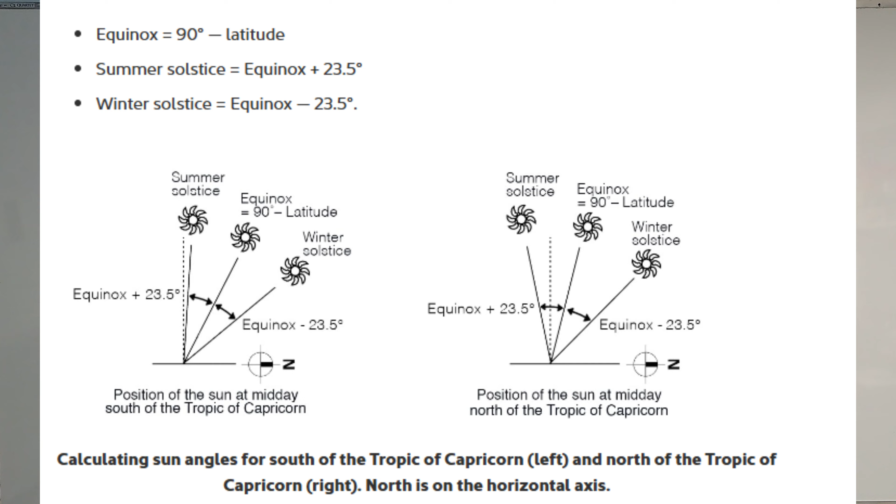The first thing we need to work out is what our winter sun angle is. So it should be a picture pop up on the recording. Basically, we're looking at our winter equinox angle - our sunshine angle is going to be our latitude, 90 degrees minus our latitude. So that's our equinox.

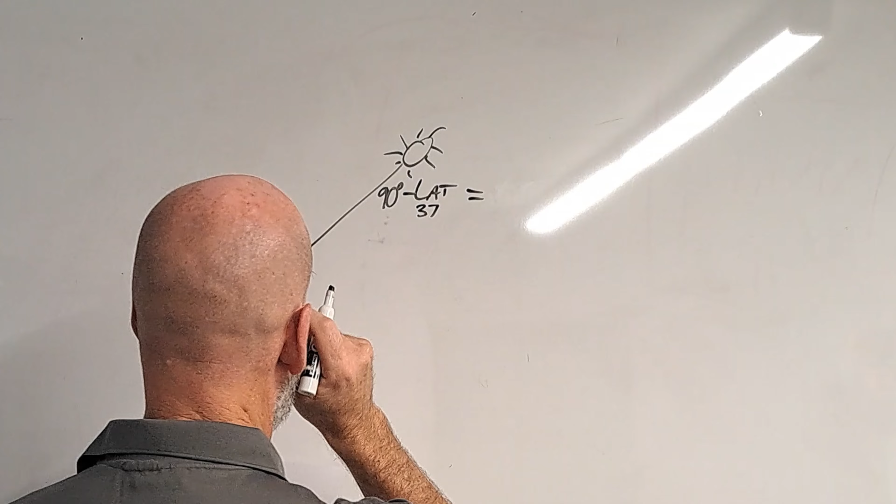So for where we are currently, or where we're going to base this out of - where I currently am - we are at near enough 37 degrees. So at 90 minus 37, that's 53 degrees, so 53 degrees is our equinox.

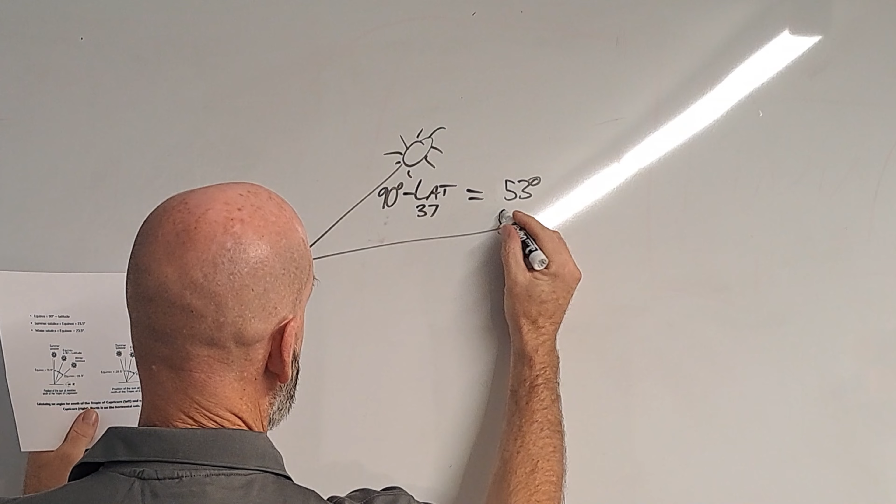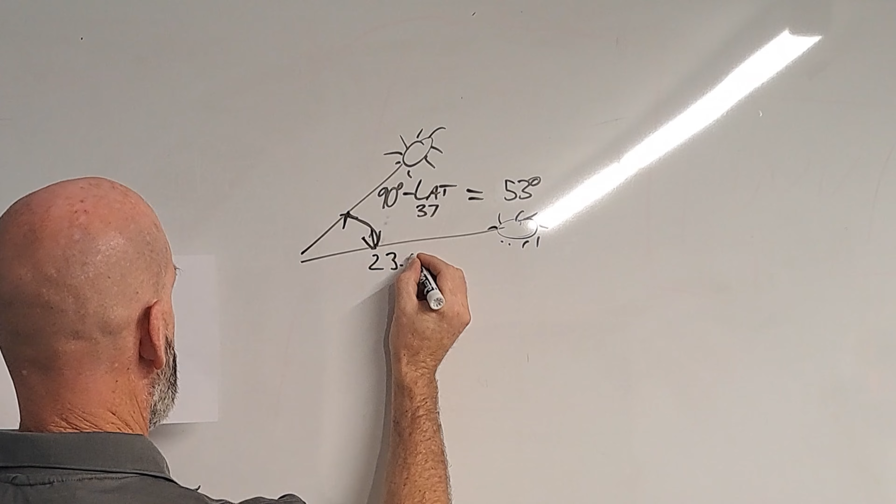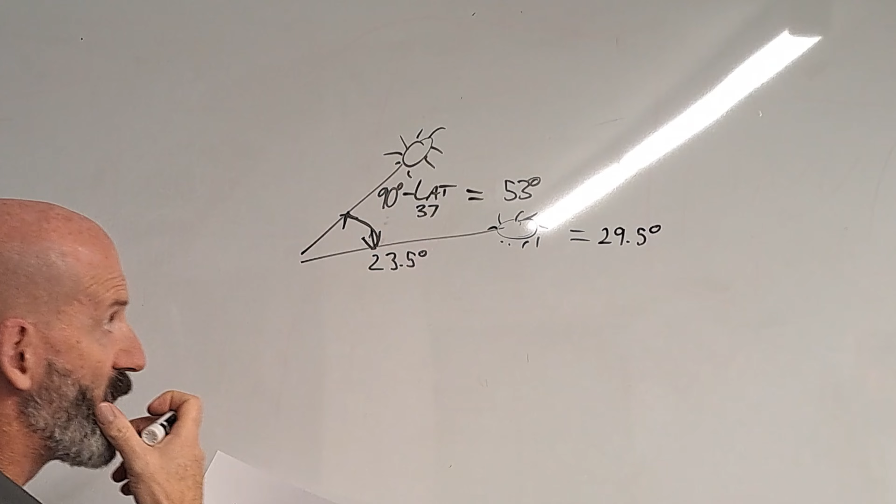Now, to get to our winter solstice, because it's lower in the sky, there's going to be a reduction in angle of 23.5 degrees. Let's see if my maths are any good here, which should give us a winter sun angle of 29.5 degrees. Okay, if I've done my maths right, that should be correct. It's near enough, so we can just round that up and say 30 degrees.

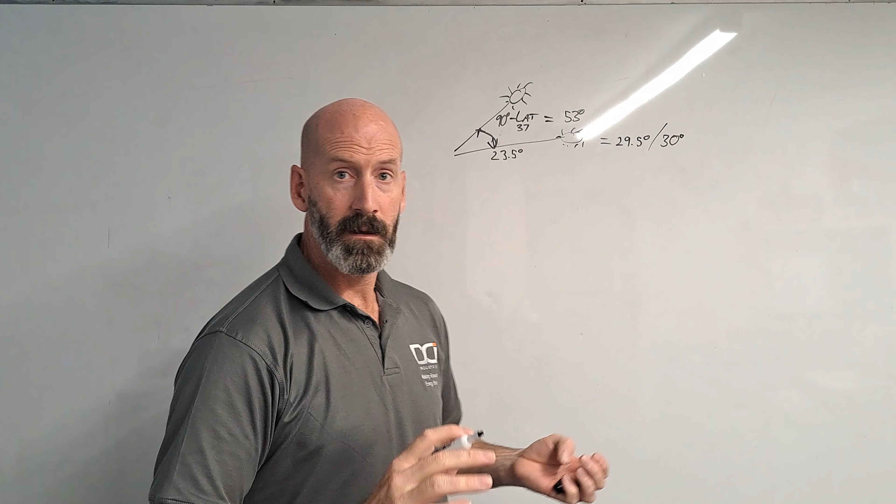So now what we've got to look at is the setup of how we would actually set some panels up. I'll leave that up there for now. Okay, let's set some panels up.

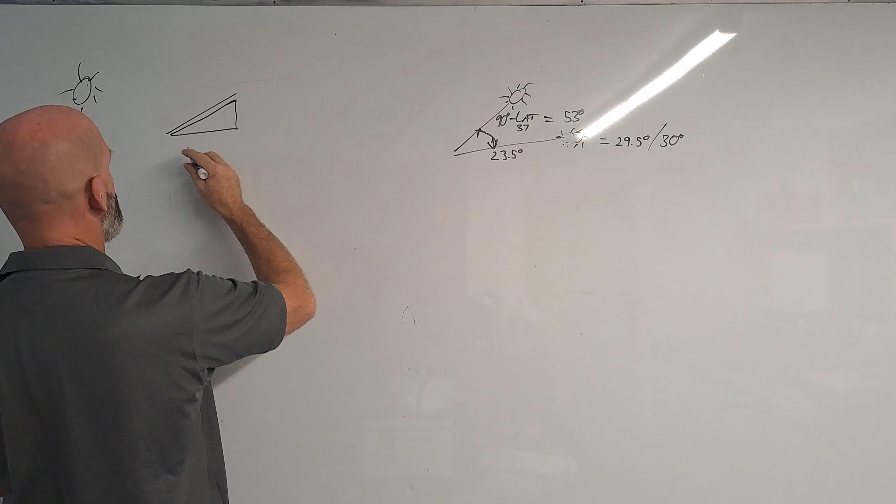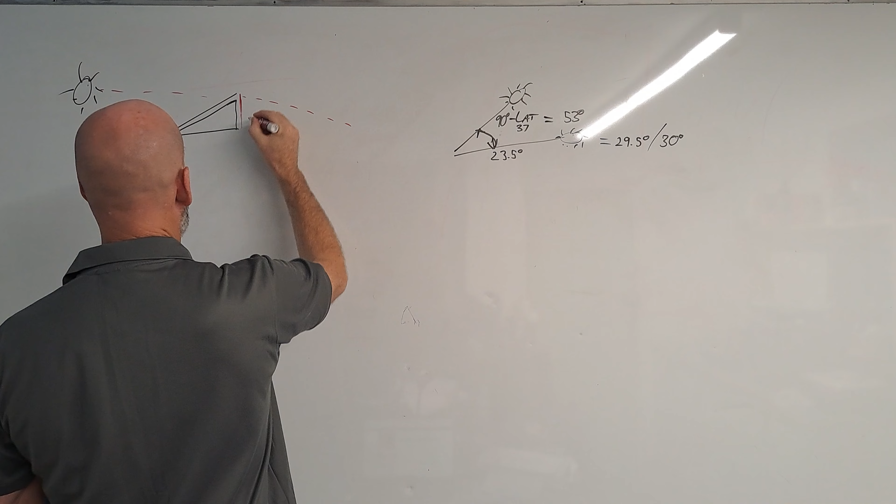So let's say we've got our sun over here. We're going to have our first panel there, which will have a frame - generally we're using tripods or some similar setup. Then, from the sun, there's going to be this reverse angle, which will create from that same height all the way through this reverse angle, and that will tell us where that shadow will hit.

We're going to add plus 100 millimeters there, and then we can put our second panel with its tripod under it. So what we need to know is, from this constant point of the back edge of that triangle frame to the back edge of the next triangle frame, what that distance is - because that's going to tell us what all of our spacings are going to be.

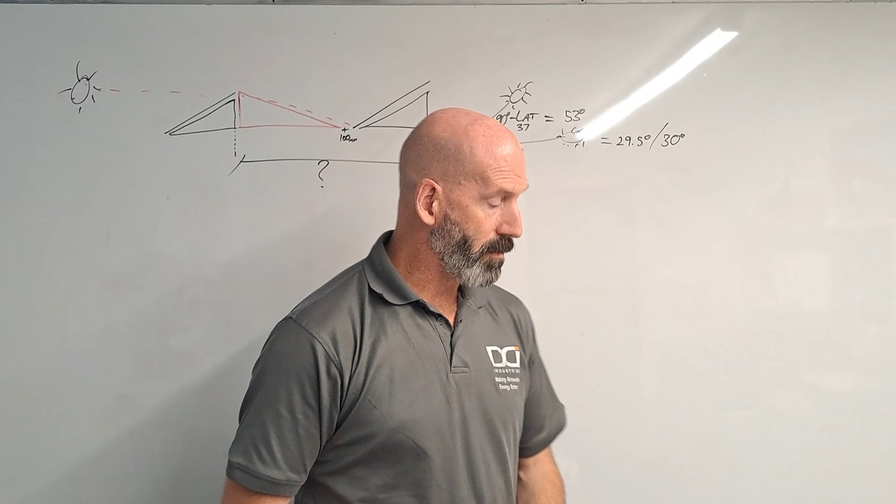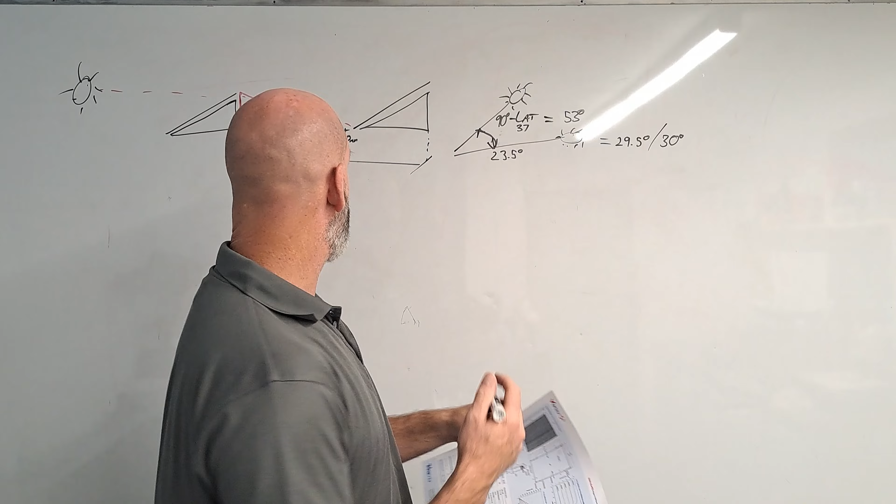So we start this with what we do know - let's fill in what parameters we know. We're going back to Pythagoras' theorem on triangles when we get into this. So we're looking at the panel that we're going to use - very important, that's our physical size. Our panel overall length is going to give us our hypotenuse, which is 1762.

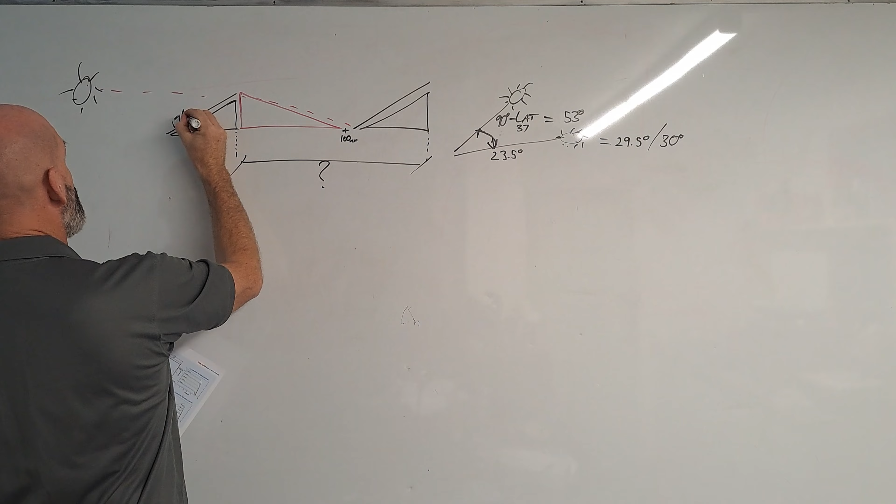So we know this one here, 1762. Now we don't need to worry about how far off the roof or anything it is, because by using the same mounting system each time, we're going to have the same spacing off the roof on either side. So we just pick a definite set point, which is going to be the front edge of the panel, or in this case, the back edge of the frame - they're still all consistent. Anyway, let's run this one.

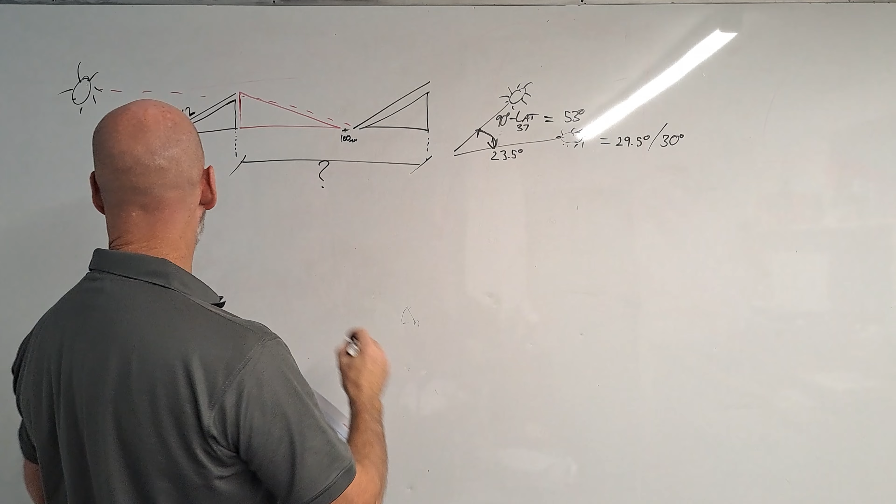And so we know what pitch we're going to put these at as well - we're going to put this at 30 degrees. It's pretty standard for the southern part of Australia. We want to pitch at 30 degrees to pick up that winter sun.

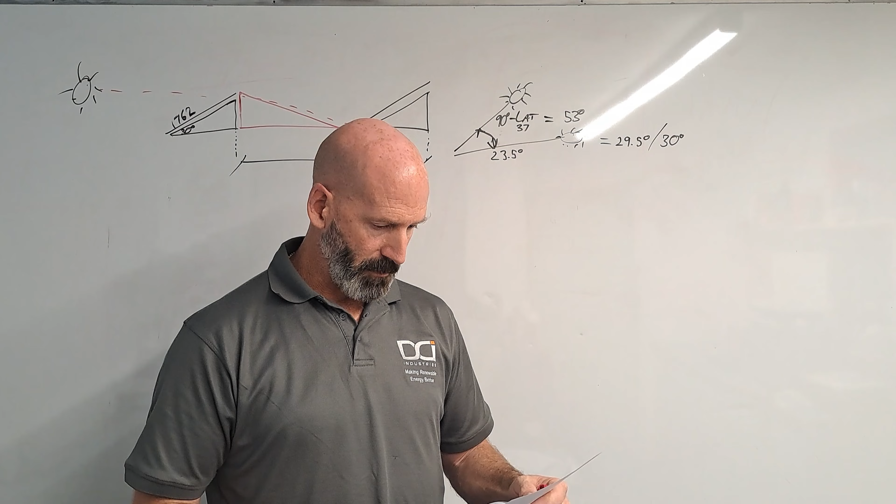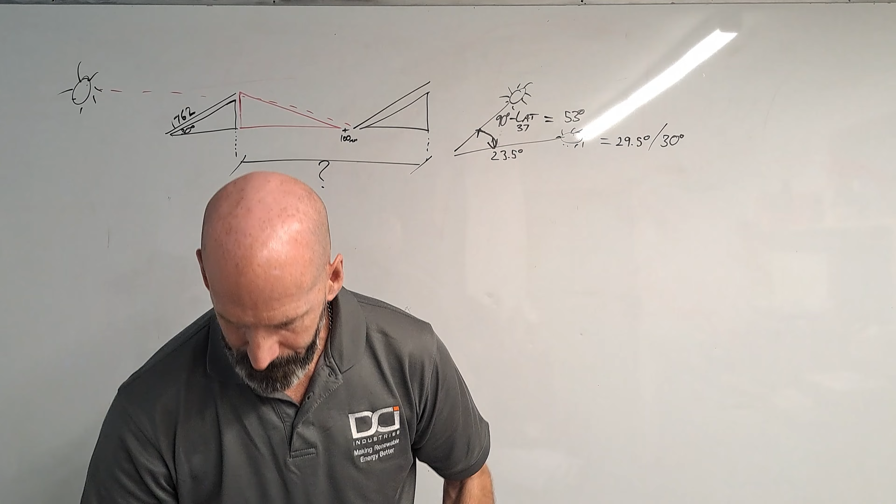Okay, that is going to now give us - on this, we know our hypotenuse and we know our angle. The quickest way to do this, if I can wake the laptop up, is you just jump online and grab a right angle triangle calculator.

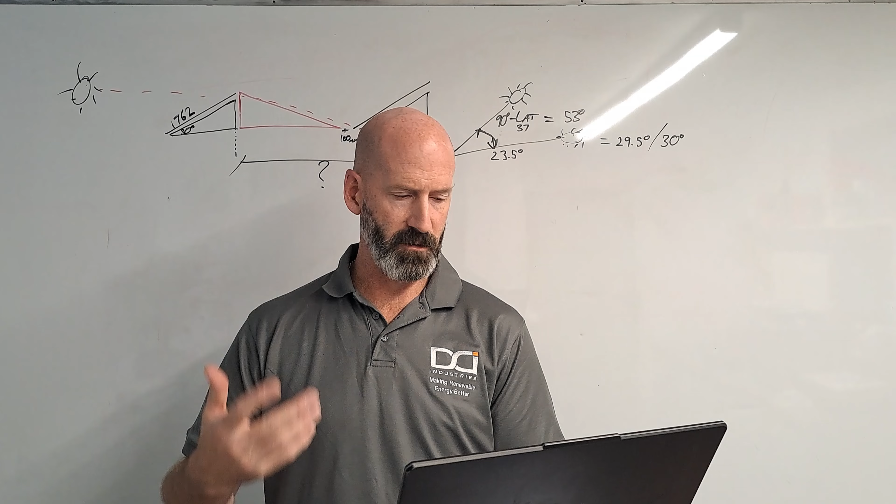And so it will let us fill in - what's our A angle is 30. It's going to give us, let's get rid of that - our hypotenuse was 1762. You only need to have one length and one angle, and it will give you everything else, because a right angle triangle works on fixed parameters. We know what that other degree measurement is.

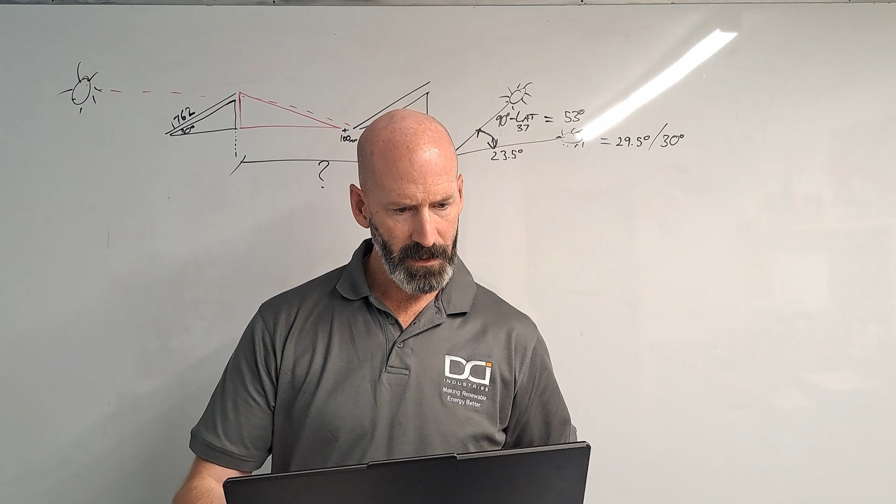So that tells us now that A, which is our rear height, is 881. So that is this height from here to here - that there is 881.

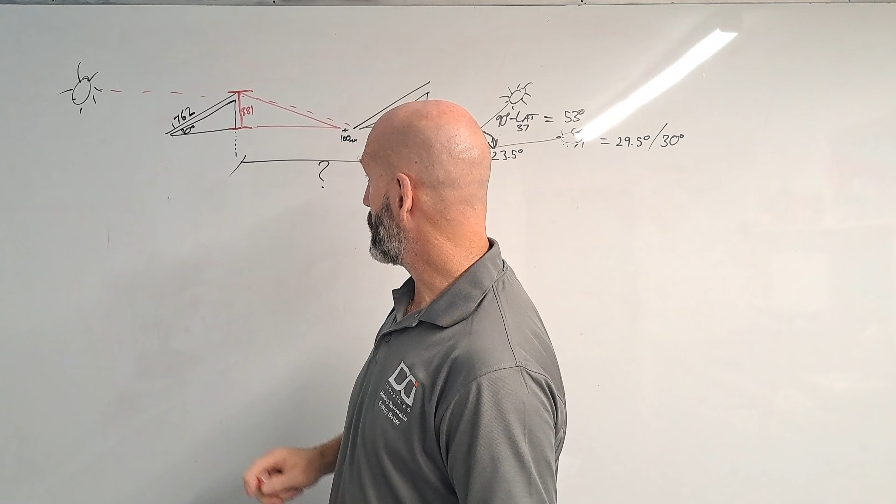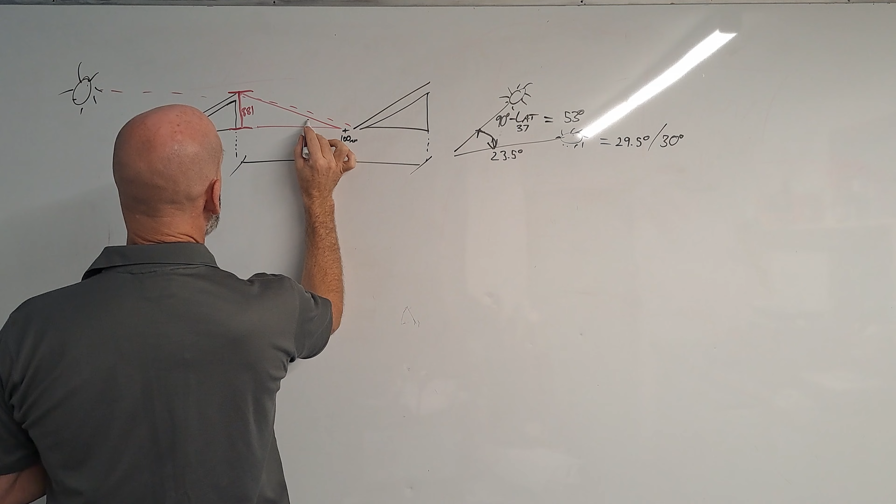Okay, that's the only other height we need in this figuring out, the rest is irrelevant. So now that we've got that height, and we know our sun angle - whatever we calculated that at, let's say 30 degrees - it means we also know that this, in its reverse, is 30 degrees. That's that same angle we're looking at with that shadow. So this is midday in the middle of winter. Now let's recalculate this.

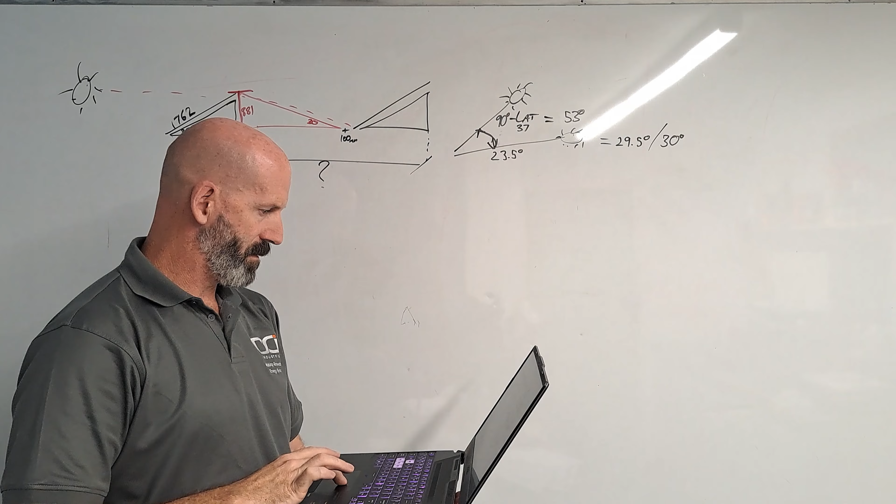We've got the same... well, actually it's going to come out the same. I'm just looking there going, hang on, this is going to come out the same. If that number was different, this would all change. But anyway, because this is 30 degrees, that's 881. We're going to be at 1762 as our reverse angle, just because both angles are 30 degrees. If this location was different, and that number is anything other than the same 30 degree pitch, then this calculation would change.

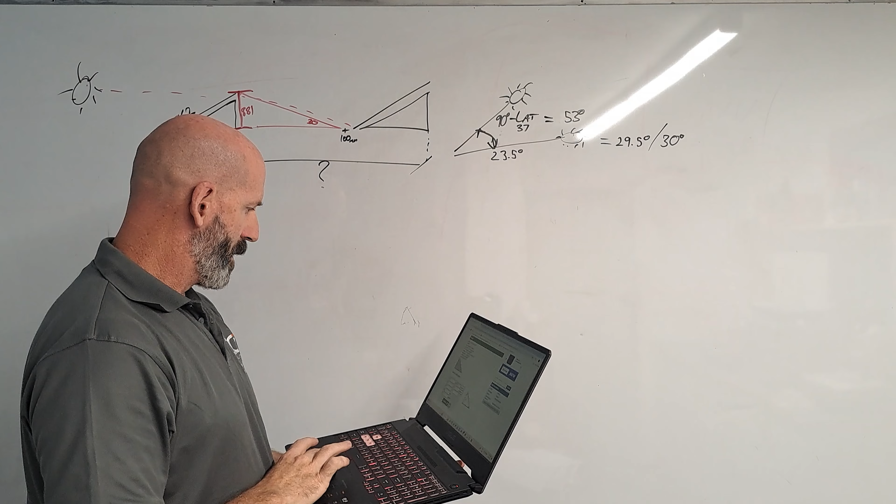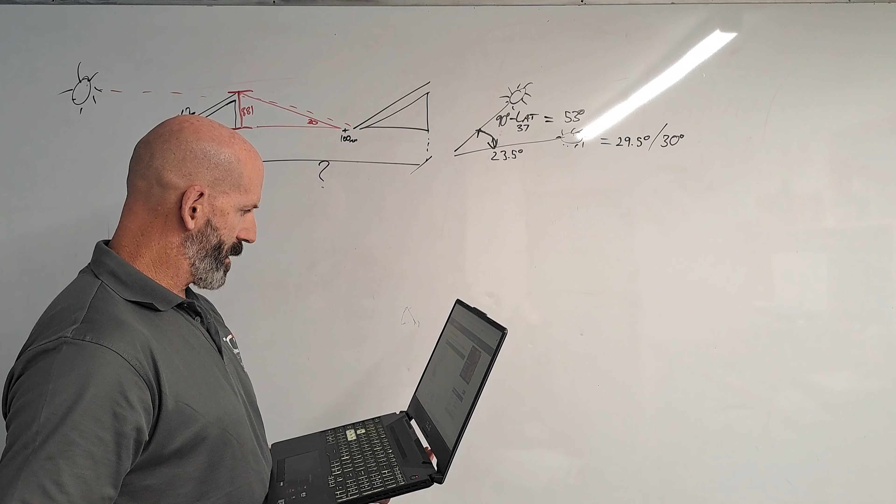So let's just go through it. The height there is 881, 30 degree pitch, we're going to calculate that, and it gives me my C there, 1762. It also proves our calculation was right. So that means that one there is 1762 - actually we did need to write one other measurement in there, B, which is 1525.

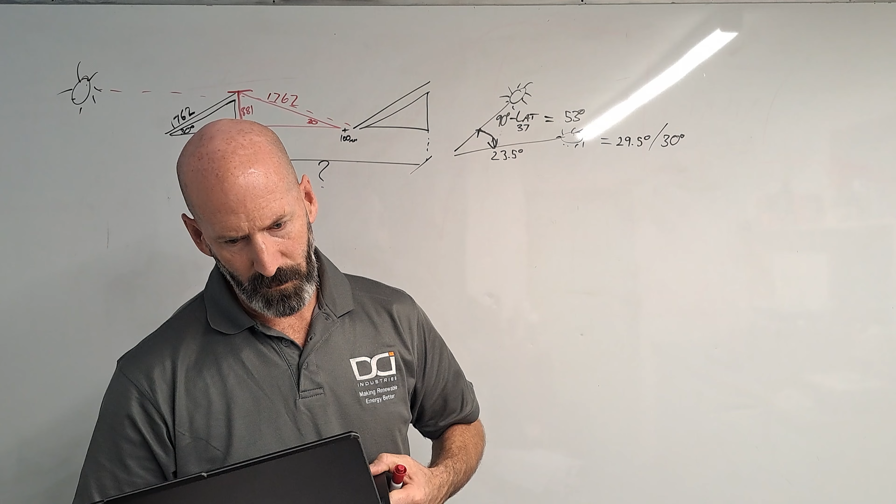Thankfully it's the same for both, 1526, we round up. So 1526, 1526. Now again, if it wasn't 30 degrees, those numbers would be different. So that gives us our length to this center point, and then our length again back here.

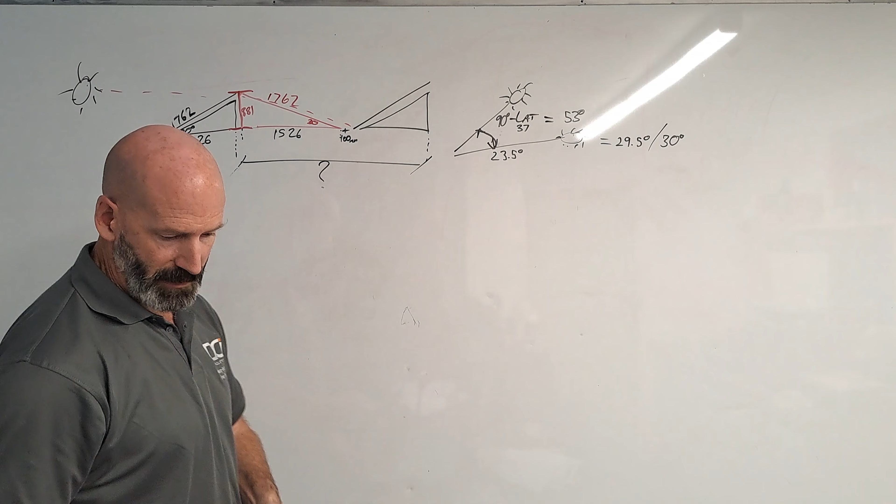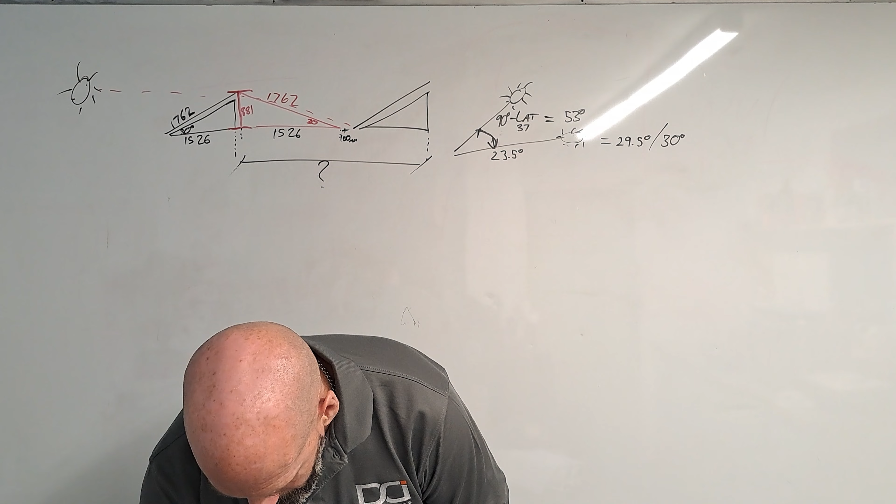So now we're going to add up our two bottom lengths, now that we know what that is. Let me do that - just to make sure my calculations are accurate, I will type it in, 1526. So that is going to give us 3 meters and 52, so 3052. So from the front edge to the back edge, that there is 3052.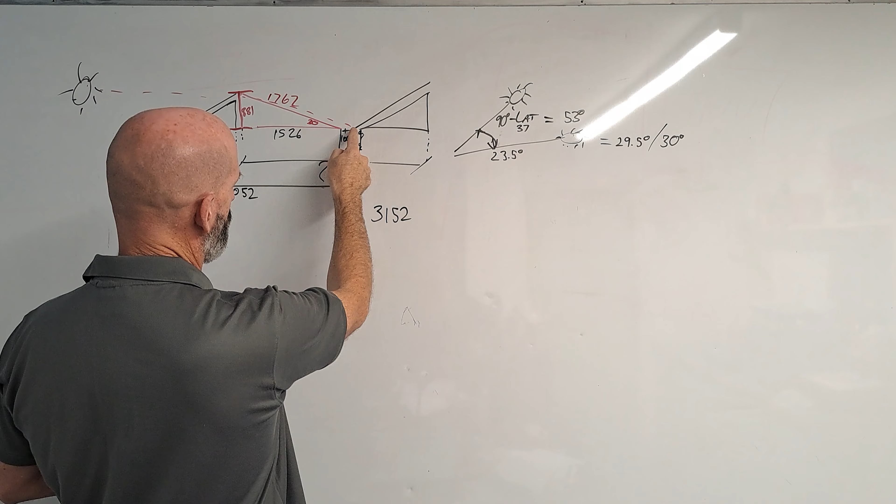Then we're going to put our 100 in there, and that's where we'll start our next one. So our spacing on this is 3152. Now that we've got this 100 mil of play we're putting in here, this is just to make sure we're definitely clear of any shading and any issues in the roof spacing or roofing material. And just to make it easier for all your rooftop calculations, I would just make that 50, so that actually becomes 98.

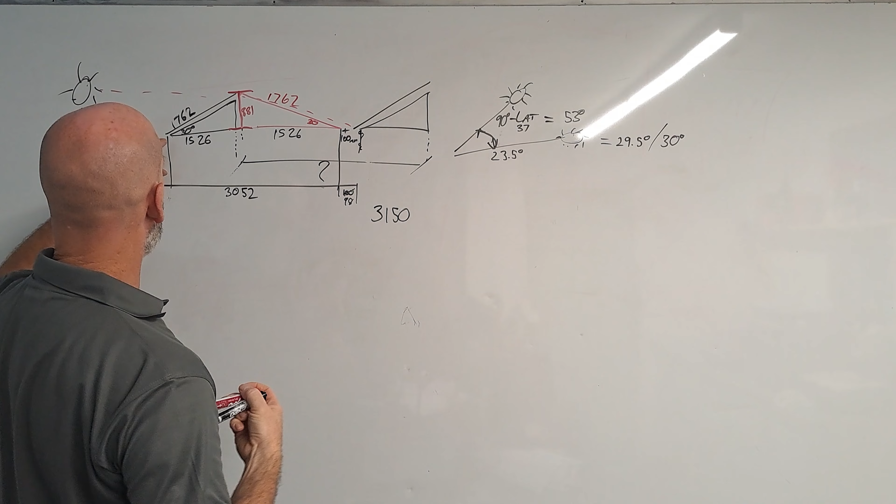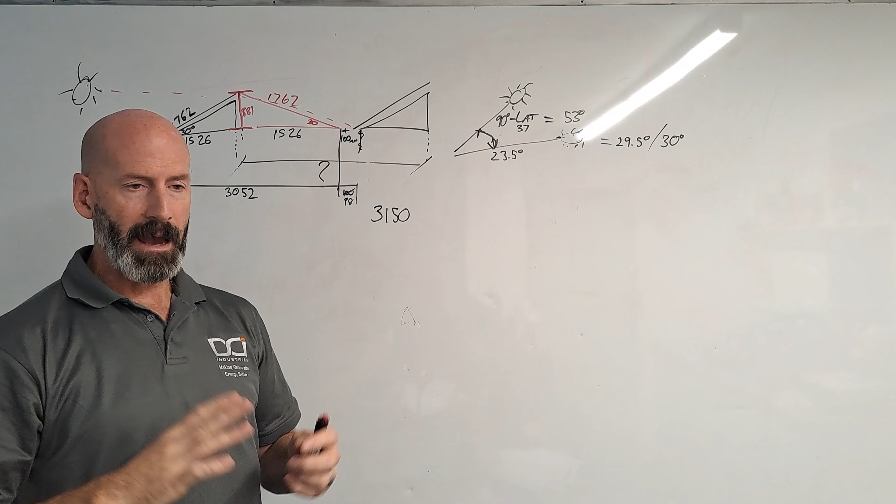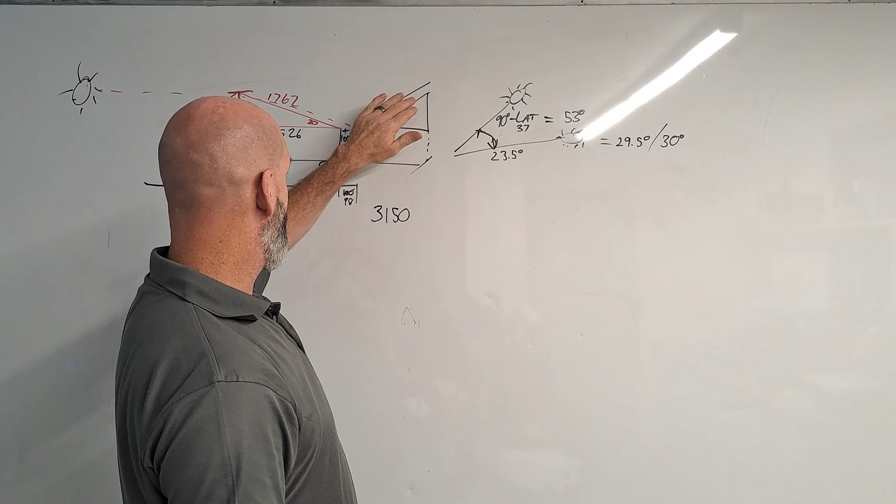3150 as a spacing is from any fixed point. So that's going to work if you calculate it from front edge of panel to front edge of panel, or back edge of frame to back edge of frame. As long as you use the same spacing, this is going to give you clear sunshine at the winter solstice for this location. And anything in summer, or anything that's not winter - anything with a better sun angle - because the sun comes up higher in the sky, you're going to have less shading issues. So this guarantees we've got no shading issues for winter.

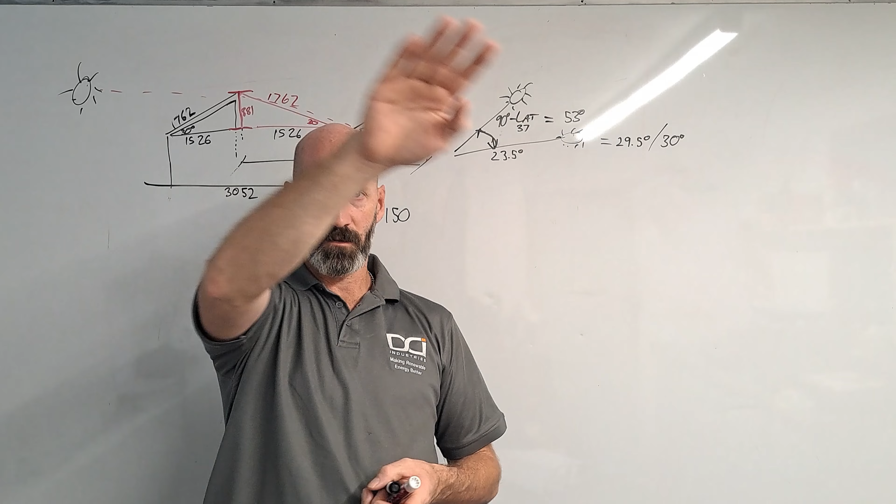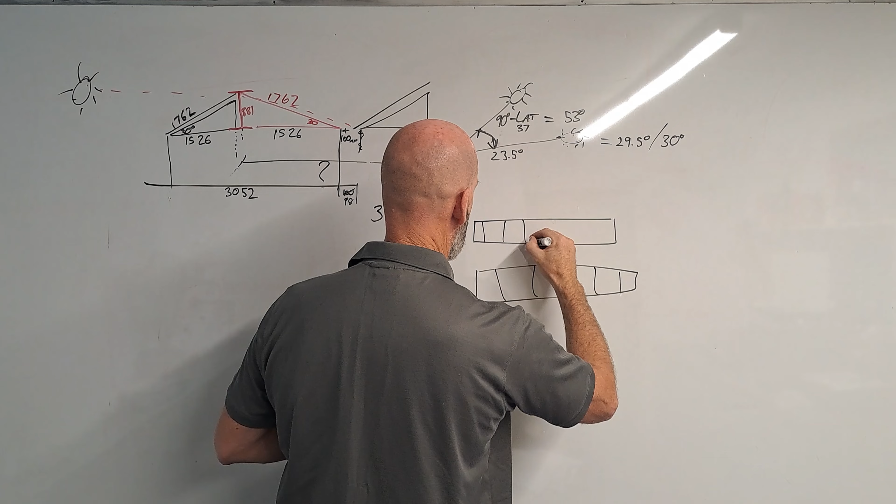Now the other thing you might be thinking: well, at lunchtime the sun is at its highest point and it fades lower left and right during the day. Yes, but what you have - let's say we've got a row of panels, terrible drawing I know, but bear with me - when the sun is shining in here, it's going to hit these panels and cast that reverse angle, and that now creates this shading through here.

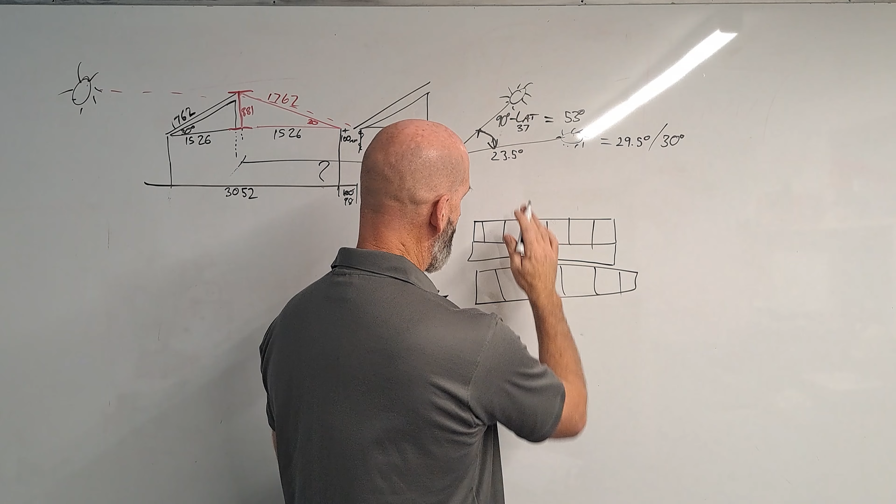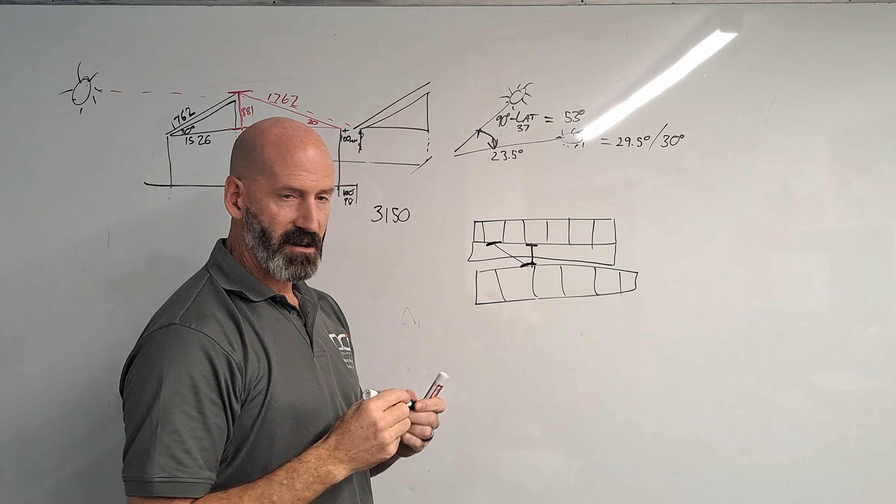As the sun moves - early in the morning, midday, late in the afternoon - this angle from the sun to the top edge of the panel over to the next set of panels actually gets longer as the sun gets lower. Of course, if the sun's lower, we need more distance. We get that because rather than being straight on, we're now around to the side. So rather than having that distance between the two rows, you've actually got this distance. As the sun drops down, it goes round to the edge of the array, and for the most part, you won't get any other form of shading on there. So working it out off the midday sun actually works for that reason.

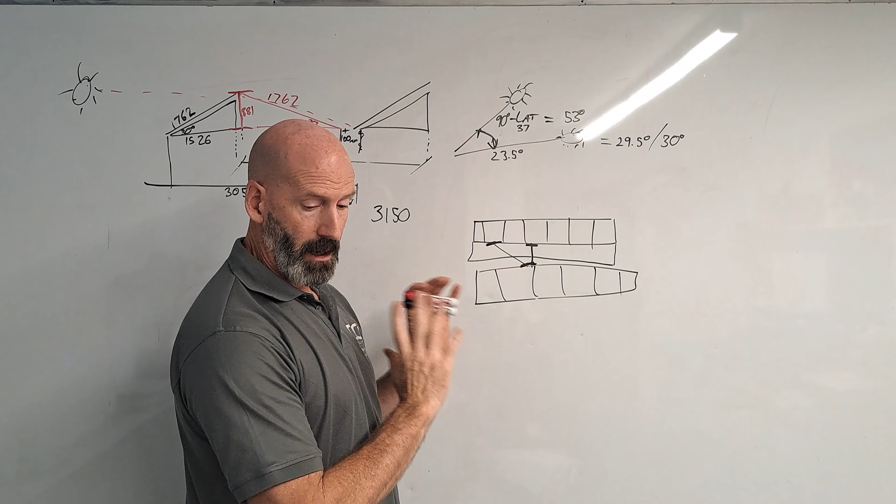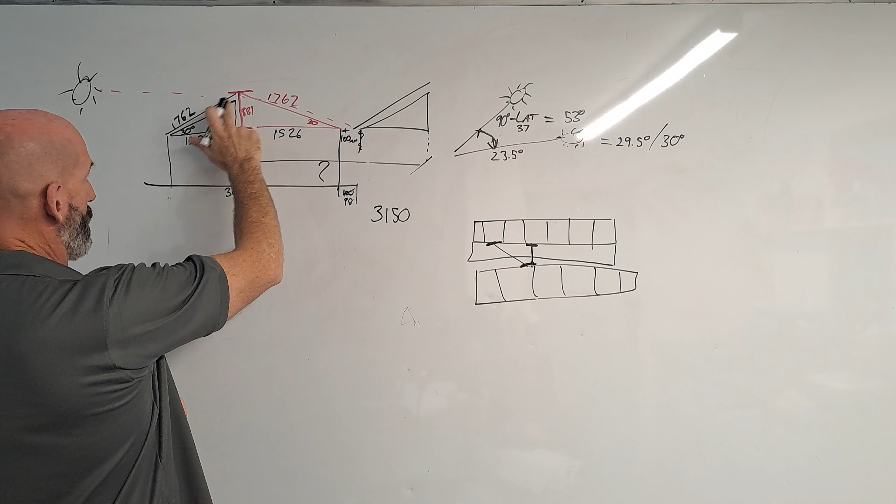Hopefully that's clear enough. If you're needing to work out your spacing, this is what you do. Remember, you're going to need to know what your pitch angle is on the frames, on your panels. You're going to need to know the overall length of the panels, and then you can calculate everything else. You're also going to need to work out your winter solstice angle before you start, but that's it. Then you can just plug that in, and that is going to give you how to work out all your array spacings.